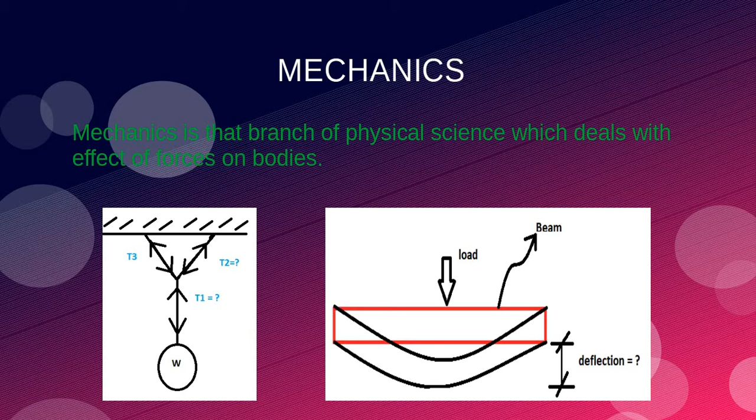It is because water applies a force on external bodies which we call buoyant force, or upthrust force. This phenomenon was explained by Archimedes, and this principle is known as Archimedes' principle: if the weight of the material we drop in water is less than the force which is acted upon the body by water, then the body will float. But if the weight of material which we drop in the water is more than the upthrust force, then the body will sink. So these all are studied in mechanics, or more precisely in fluid mechanics.

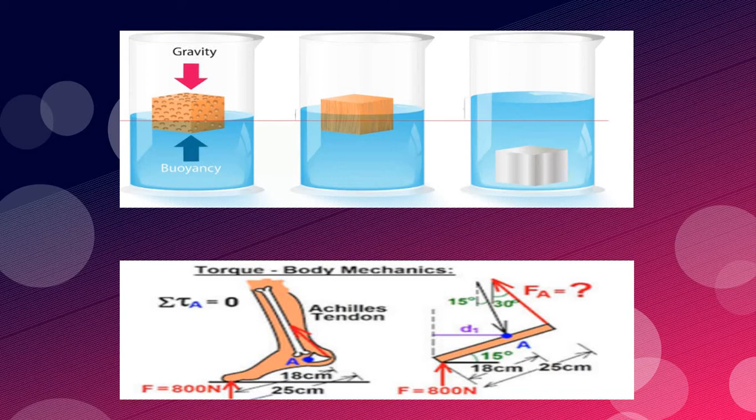Now, if we talk about the classification of mechanics, mechanics is broadly classified into three branches based upon the body on which the force is acting.

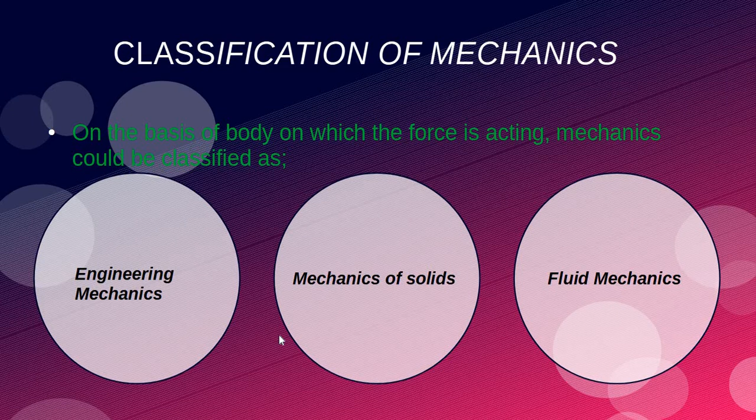So we have engineering mechanics, also called mechanics of rigid bodies. We have mechanics of solids, and we have mechanics of fluids, or fluid mechanics. So in engineering mechanics, we basically consider rigid bodies. What is a rigid body? A rigid body is one which doesn't deform, or which doesn't change its shape, or which doesn't change its size under the action of force.

And that's why this branch is also called rigid body mechanics. So it is that branch of mechanics in which we study the behavior of a rigid body under the action of applied force. And as I told you before, any body which doesn't undergo deformation, change in length, change in shape, or change in area under the action of force is said to be a rigid body. Actually, this is an ideal term, and there is no rigid body on the planet Earth.

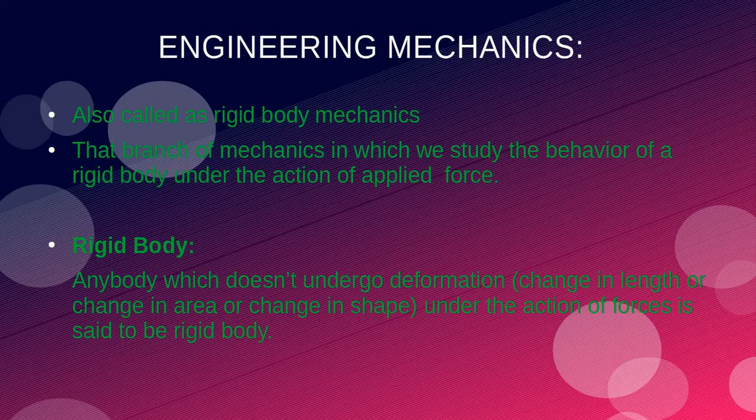But in order to understand the more complicated problems and deformable body mechanics, we first of all need to study and learn the analysis of rigid bodies. So that's why we study this branch of mechanics. And in this playlist, I will be uploading videos related to rigid body mechanics.

Now, another branch of mechanics is the mechanics of solids, also called deformable body mechanics. In this branch, we deal with internal forces, which are the result of an external force. We see how they are distributed. For example, if we talk about a beam, then we draw shear force and bending moment, which show the distribution of internal forces, which we will be seeing in mechanics of solids.

Now, these internal forces cause stresses, which are basically internal forces per unit area. So, if the internal stress at some point, for example in a beam, is more than the strength of the member or material, then the material has chances to fail or even collapse. So these internal forces cause deformation and stresses.

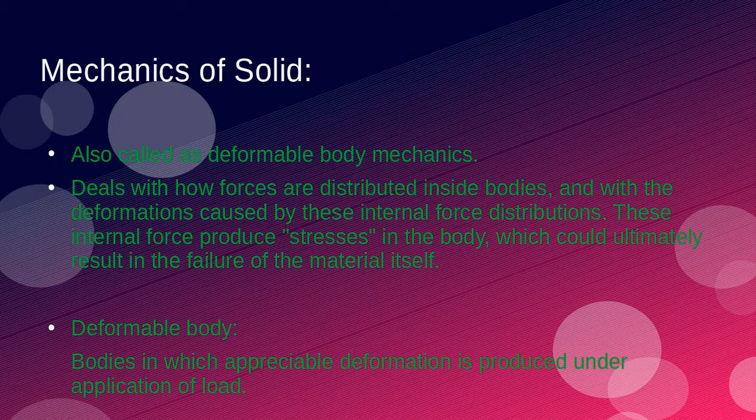So if we are dealing with a system which deforms or changes shape, length or size, etc., we say that body is a deformable body. For example, in this picture, we have two beams. One is considered rigid, and the other one is considered deformable. The right side, because that one has deflected due to suspended weights.

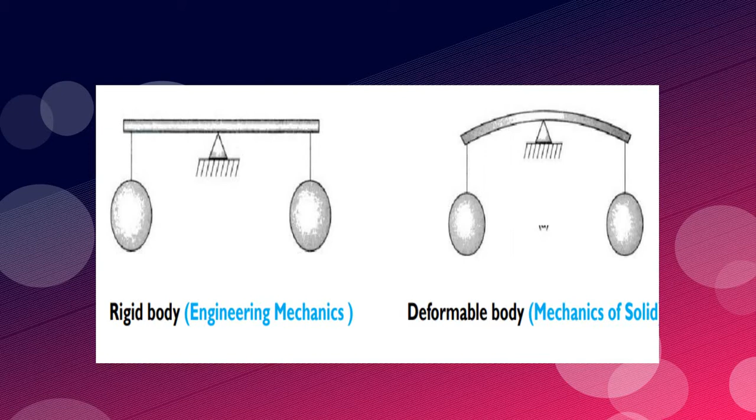So the third branch of mechanics, based upon the body on which force is acting, is fluid mechanics. In fluid mechanics, we basically deal with the behavior of fluid when it is acted on by forces. So fluid is basically anything which can flow. That is to say, gases and liquids are fluids. So we analyze different types of fluid systems basically.

So the mechanics of fluids is the branch of mechanics that deals with liquids or gases. Fluid mechanics will be studied in courses called fluid mechanics, hydraulics, and other relevant subjects.

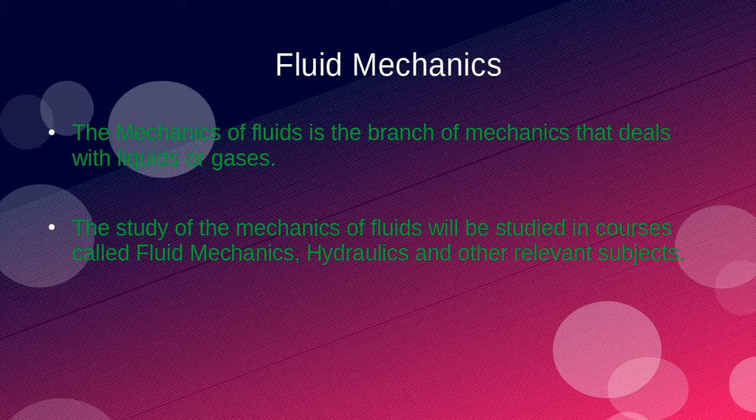Now let's talk about the classification of mechanics based upon the response of a body or a physical system against the applied force. So mechanics is broadly classified as statics and dynamics. If the response of a system, that is to say the velocity, displacement, internal forces, etc., does not vary with time, that study comes under statics. But if the response of a system is varying with time, we say that this branch of mechanics is dynamics.

So the study of such systems in which the forces or causes of motion are continuously changing with time comes under the umbrella of dynamics. Also, there may be a third class of mechanics in which the force acting on the system is neither completely static nor completely dynamic, but in between. And for simplicity, we assume that the acceleration is zero, due to which no dynamic effect is produced. So we consider it as static.

For example, all kinds of structural systems or buildings are in a quasi-static state. There are always some kinds of dynamic loads acting on them, for example wind load and earthquake load, although they are very small, due to which we consider them as static. So in this class of mechanics, the dynamic load is acting, but at a very slow rate.

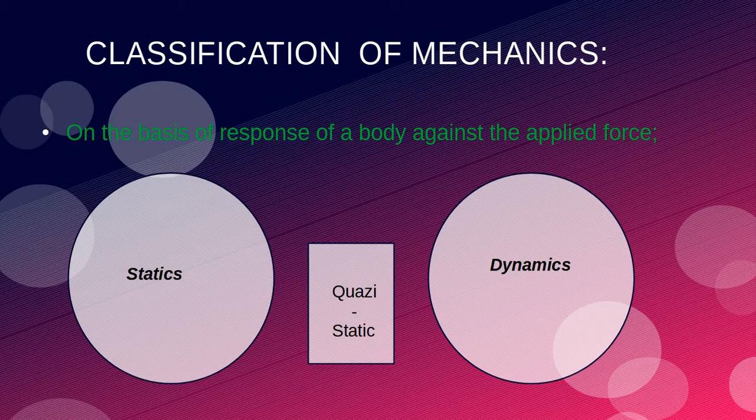Now, dynamics is further classified as kinematics or kinetics. In kinematics, we do not consider the forces causing motion, but rather we deal with motion parameters, for example displacement, time, speed, etc., without taking into consideration the cause of the motion.

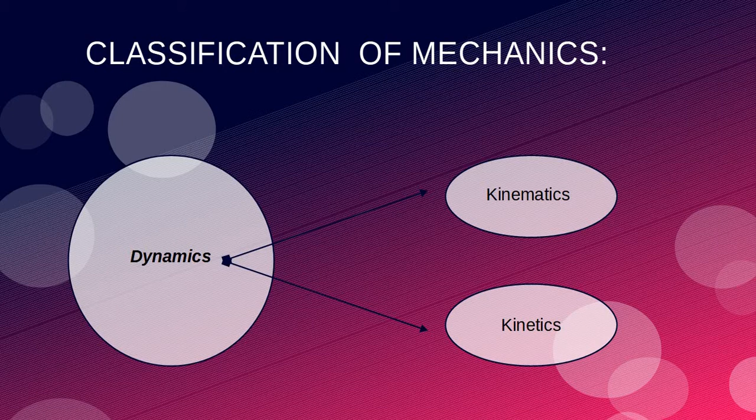For example, there is one famous equation of kinematics, that is s = ut + ½at², that you may have studied in your school physics. In this equation, we do not consider the force. So this equation comes under kinematics. While in kinetics, we consider the cause of motion. For example, Newton's laws come under kinetics.

Finally, why is engineering mechanics so important to study? The answer is that besides its application to real life problems, it is the prerequisite for most of the subjects that we study in civil engineering. For example, mechanics of solids, structural analysis, reinforced concrete design, steel structures, structural dynamics, earthquake engineering, geotechnical engineering, foundation engineering. So we will, inshallah, be making playlists for each of them.